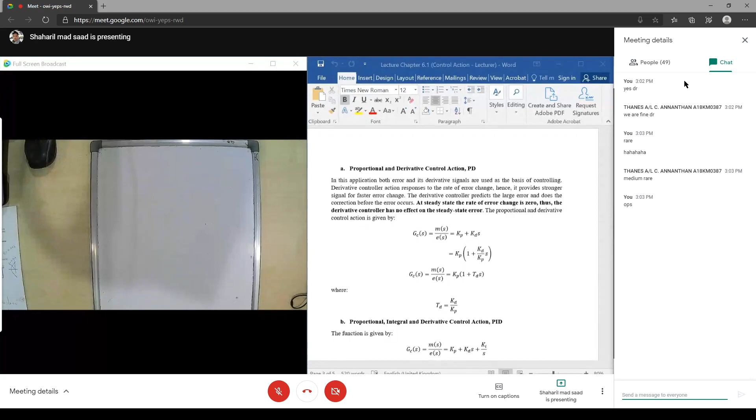Okay, for today's class, so what I promised to you, we're going to do some revision about test 2. Your test 2 is this Sunday, right? And what did I mention to you?

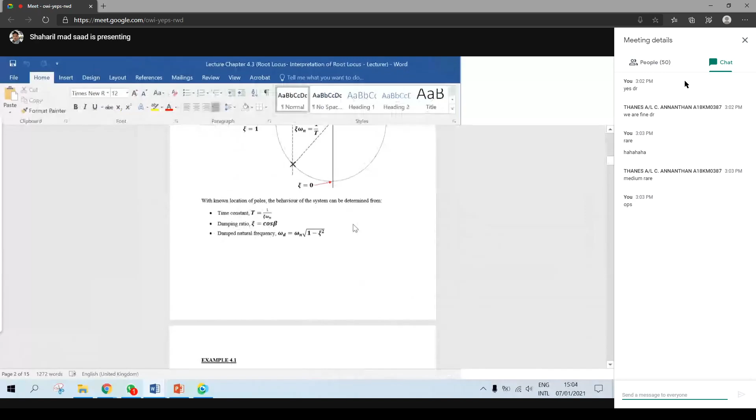Okay, stability and root locus, interpretation of root locus, right? Normally this topic is about interpreting what is the value of k at certain roots you got, and so on. This chapter is normally covered as the last chapter, chapter 6, and normally other lecturers don't teach this chapter yet. So for test 2 you'll focus on stability and root locus, and you need to remember and know about frequency analysis, up to the block diagram in series - sorry, up to frequency analysis in series.

Okay, so I have shown you a few things on how to do it quickly using the calculator and so on. So for today, I hope that we can do some revision about it, all right?

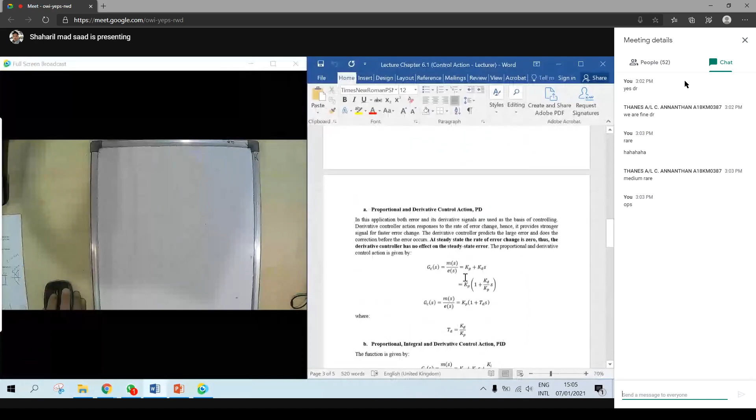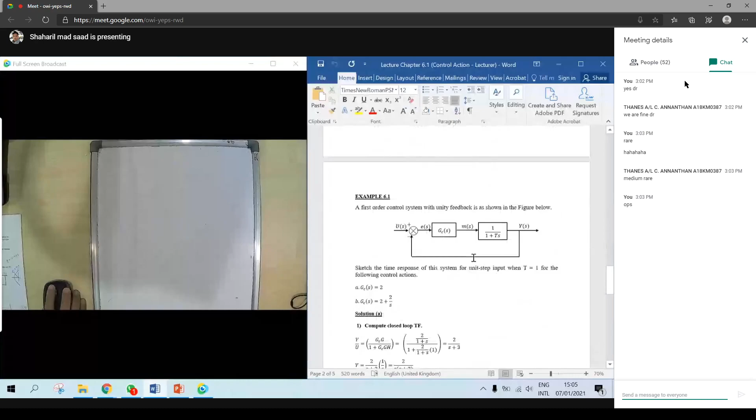However, for the root locus, I will go through our next topic - that means we go through the last topic, chapter 6, because this one will implement root locus also. So at the same time we can do some revision about this. Is it okay?

We can go to this chapter, chapter 6. Okay. Right, can I start the class now?

So this is chapter 6. What we have discussed a little bit, I think about 5 minutes, so maybe I can go through it again.

So for the control action, this is the parameters that we're going to control: steady state error, of course, the overshoot, of course, the rise time - normally depends, if your system requires very fast output you can control the rise time. The more important thing is the settling time - how fast your output can achieve the desired output that you want.

For example, your air conditioning - you set it at 20 degrees, then you turn on your air conditioning, so how long will it take to reach 20 degrees? That's why we look at the settling time.

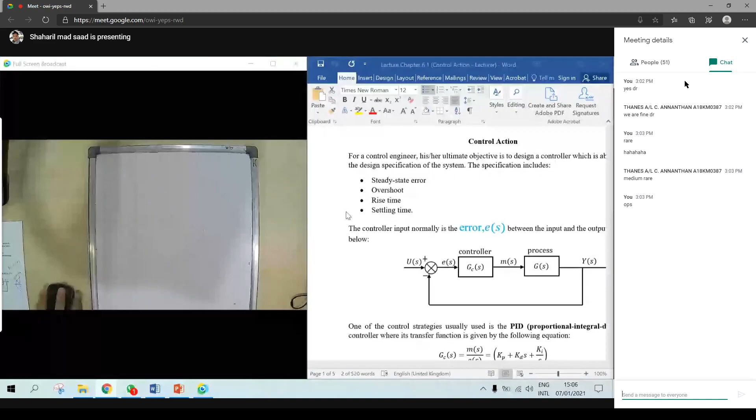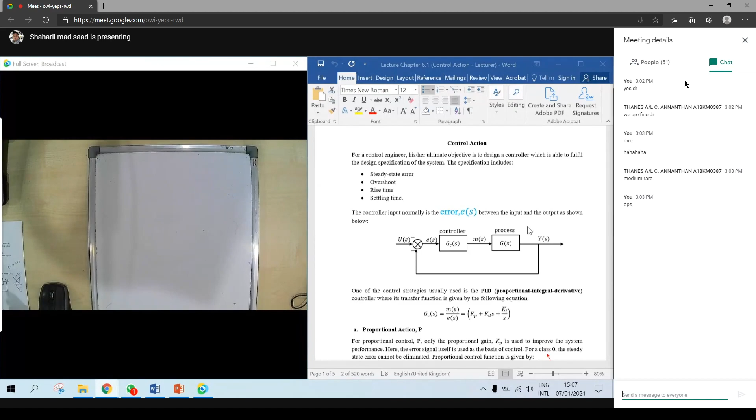For the basic control system, you will have the controller and the process. The process involves the mechanical part, like air conditioning, the circuit, and also the compressor, and so on - that's the process. The controller means you have the remote, right? So your remote sets it - fan number 1, fan number 2, fan number 3. If you set fan number 3, that means it will tell the process, the compressor, to speed up faster than before. Okay, that's one.

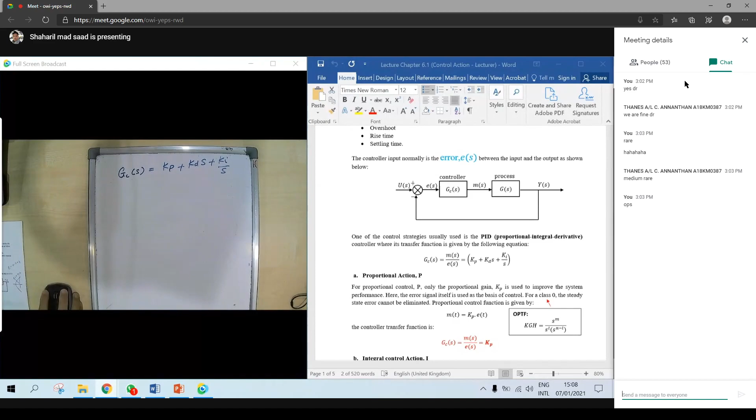Okay, for the basic one, when you implement the PID at your controller, it consists of GC, that means gain for the controller - it consists of KP plus KDS plus KI over S. So this means this is P, this is D, and this is I - actually PID, right? So normally we call it PID, not PDI. Okay, so what is P?

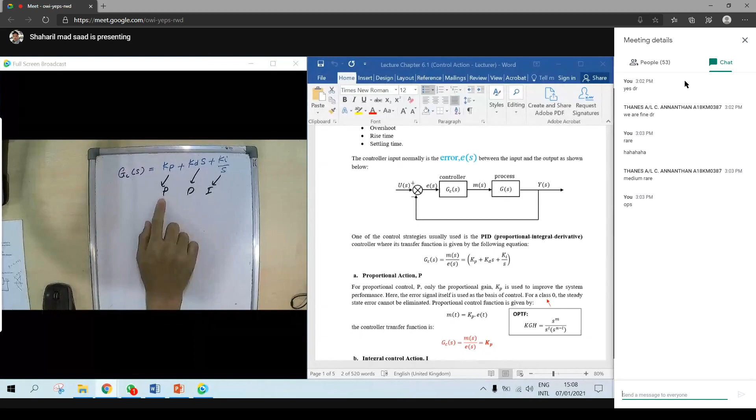P means proportional, where your GC equals KP. You can look at the question here. Integral I is based on this formula, where GC equals KI over S. Actually there are some calculations for how you get this one, so maybe I can show a little bit about this. Okay, so you get the M, KI, integral E dt here.

So when you convert into Laplace, you Laplace it. So this one you got MS, KI, and then you Laplace this one, dt.

So MS here, and then KI. When you Laplace the ET, if you remember back, we got it as ES over S here. Actually, we can use the capital, alright? Because when you Laplace, the symbol will be changed, the capital one. And then what you got here is KI over S.

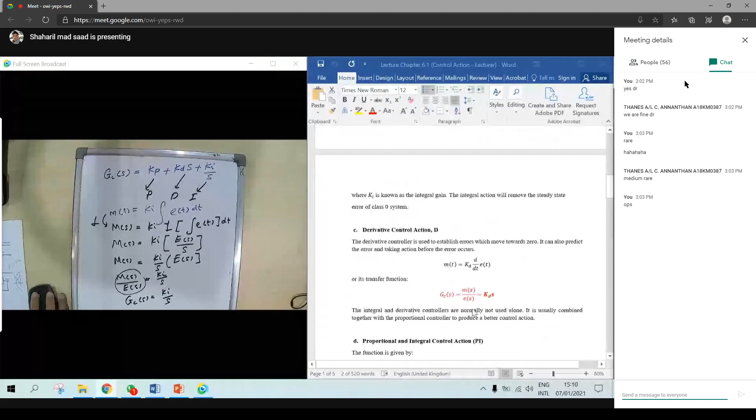The good thing about when you implement the I is you can eliminate the error. For example, for the class 0, you can eliminate it, because we want to achieve the steady state error so that we can get it to 0. And D is given GC equal to KDS.

For the derivative, you cannot eliminate the steady state error. I will show you the graph so that you can look into that.

And sometimes we combine it between proportional and integral. We call it PI. So the controller that you can use is KP plus KI over S because you combine between P and I.

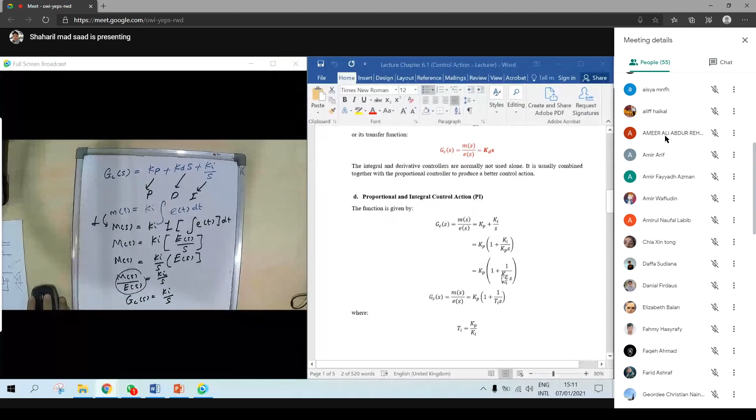Then of course, if you want to make it simple, you can just set KP, and this one is TI. TI is what? It is KP over KI. So when you do it in your MATLAB, you can play around with these two variables, KP and TI.

Some of them we combine between proportional and derivative. Derivative can minimize what we call overshoot, I will show you later. And then the formula will be like this one, KP plus KDS. And to make it simple, KD over KP here, you can make it TD so that you can just adjust only two variables.

This one. And we also can combine P and I and D, alright? We call it PID. So it's a combination between KP, KDS, and KI on S.

And normally, how to change all this value? We can change it manually. For example, you can put KP is 100, KI is 10, KD is 2. And then you can get the steady state error, and you can get the overshoot, for example, and you can get the settling time.

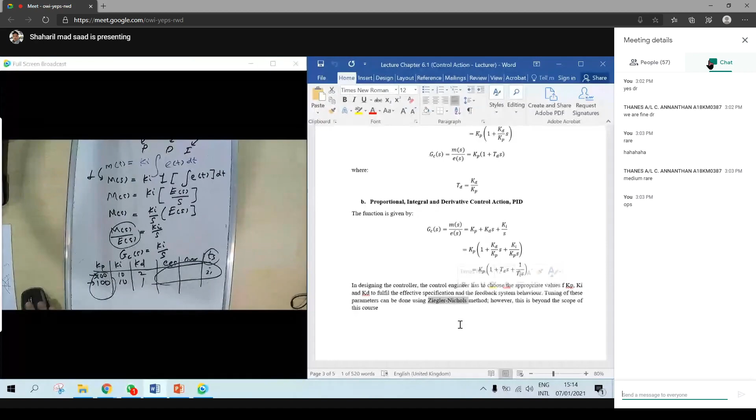If we want to get the steady state error almost 0, the settling time that can be accepted like less than 2 seconds, for example, so we can use this method. However, we don't cover this in this class.

I like to show you this one so that you can get it. What is the purpose of using KP, KI, and KD?

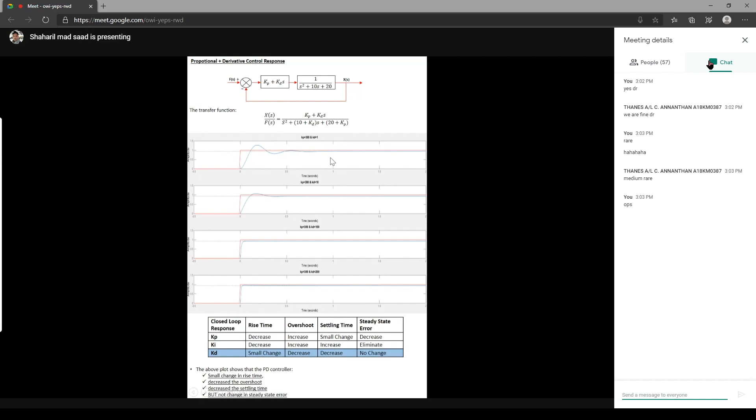However, there is no change in terms of steady state error. You will see this steady state error has almost no changes. But you can eliminate the overshoot, and the rise time will affect also a little bit. The settling time is also decreased a little bit, because like this one, the settling time maybe at this point. When you put in KD, settling time will be decreased a little bit.

And when you combine KP and KI, you fix the KP and then adjust the KI. You will see that the KI will increase a little bit the overshoot, but the good thing is the steady state error can be eliminated.

So that's why an engineer likes to combine it with the integral or KI, because we want to eliminate the steady state error. For example, you set your temperature to 20 degrees, we want to get the temperature at 20 degrees, we don't want to get the temperature at 22 degrees, 23 degrees. So we can use the integral. This is the function of the integral.

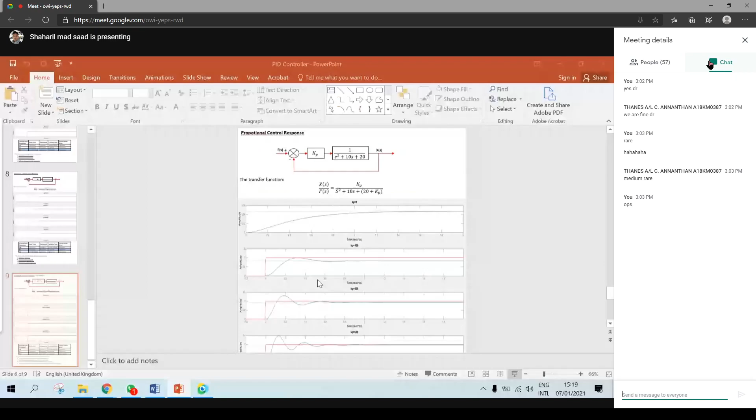And when we combine all three, P, I, and D, of course we can eliminate the overshoot, and then you can get the steady state error almost zero, actually zero. We can decrease the rise time and settling time. So far, do you understand the purpose of P, I, and D?

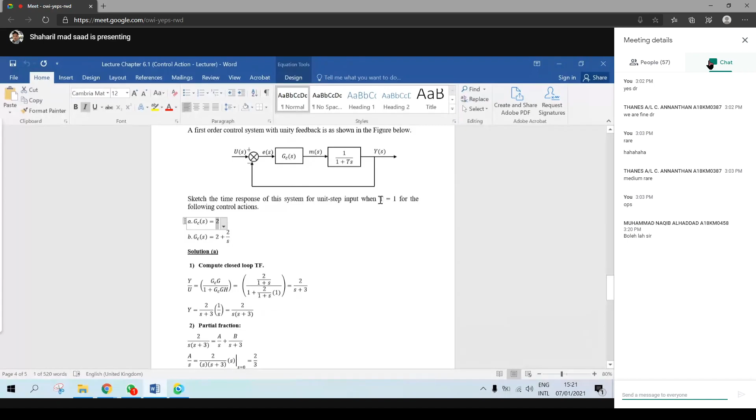Let's say you only use KP. You put GC equal to 2, so that means this one is 2, and for T equal to 1 here. So what you got is this kind of equation. You do some fraction, and then you got this equation.

Okay, let's say you combine. You use KP and KI. Your KI is 2 over S. So I think you can see the difference, right? This one is KP, and then this one is KP and KI. KI, that means KI over S. So this one, KI is 2 over S.

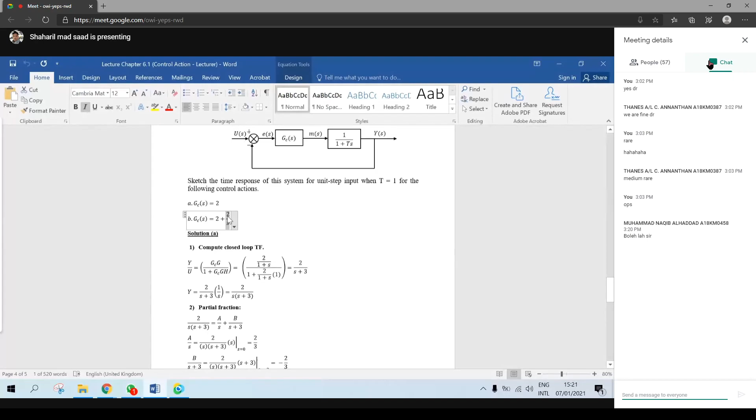Alright, okay. Any question that you want to ask? Any questions? Not yet, right? Is this clear so far? Okay. Any question? No? Okay, no question yet, sir. Alright, not yet.

Okay, alright, so let's look at another chapter. This is what we're going to focus on for your test 2. Generally, the controller is designed — never mind this one. Let's look at example 6.1.

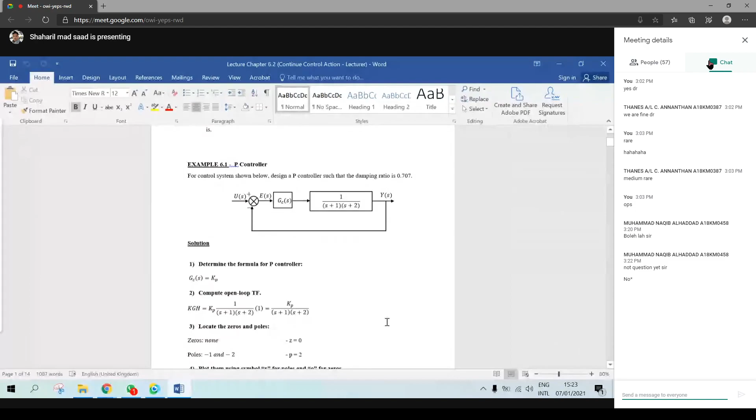This is when you apply the P controller. For the control system shown below, design a P controller such that the damping ratio is 0.707. In this case, you want to design a controller, example 6.1. So design the P controller so that it can fulfill the damping ratio of 0.707.

So the first thing is, in this block diagram, we know this is Kp. So first, GC(S) is equal to Kp. Our objective is to find what value of Kp makes the damping ratio equal to 0.707.

Okay, and then number 2, you need to compute the open loop transfer function. Remember, for root locus, the first thing you need to do is find the open loop transfer function. How do you find it? The formula is KGH. So you need to look — this one is K, this one is G, and this one is H.

So KGH right now is equal to Kp times 1 over (S plus 1)(S plus 2), times H which is 1, so you don't have H now. This one is equal to Kp over (S plus 1)(S plus 2). This is your KGH. So for root locus questions, normally Kp will be given to you, and you just draw the root locus and so on.

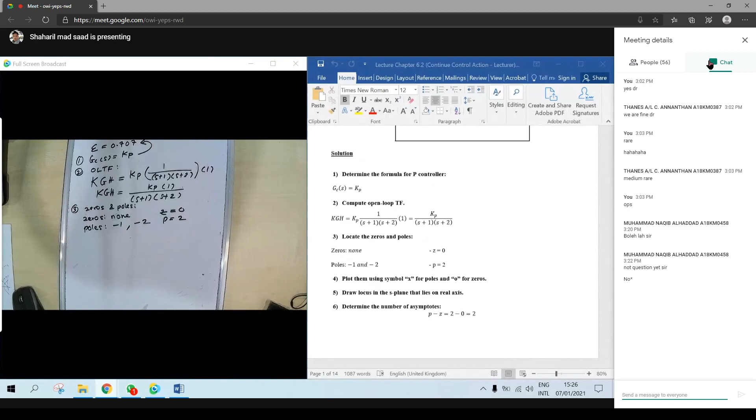And then the poles — that means S plus 1 equal to 0 gives minus 1, and S plus 2 equal to 0 gives minus 2. So how many zeros? Zero. And how many poles? Two. Okay, this is the step of root locus right now.

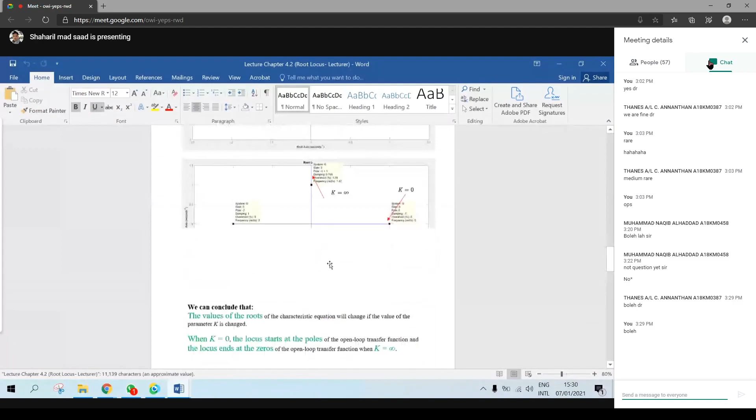Chapter 4, the root locus. You need to remember this - let me show you again. This is the root locus procedure. You can see the 2 poles here. So this one, the first one, will go to the left. And this one also goes to the left. This one is the pole and this one is 0, so poles try to find the 0. You need to draw on the real axis first, and then this one tries to find another girlfriend here.

Okay, try to look at back. Alright, so we have drawn this one. Done, and then determine the number of asymptotes.

The number of asymptote - number 5, we have drawn the root locus on the real axis. Number of asymptote is P minus Z, the number of poles minus number of zeros. You got 2.

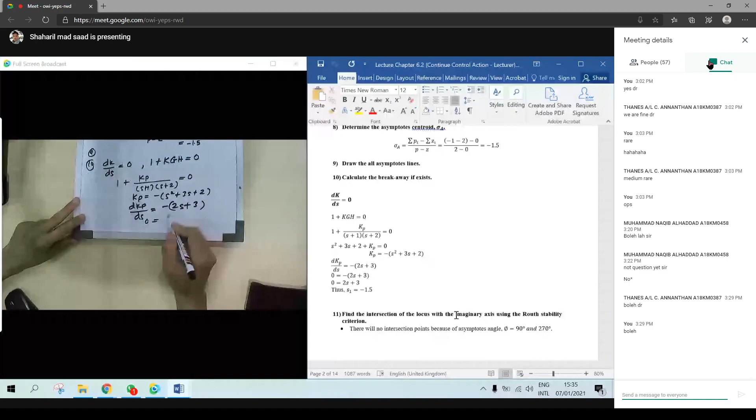Then you will find that dk over ds is equal to minus 2s plus 3. So dk over ds equal to 0, minus 2s plus 3, then you got s equal to minus 1.5.

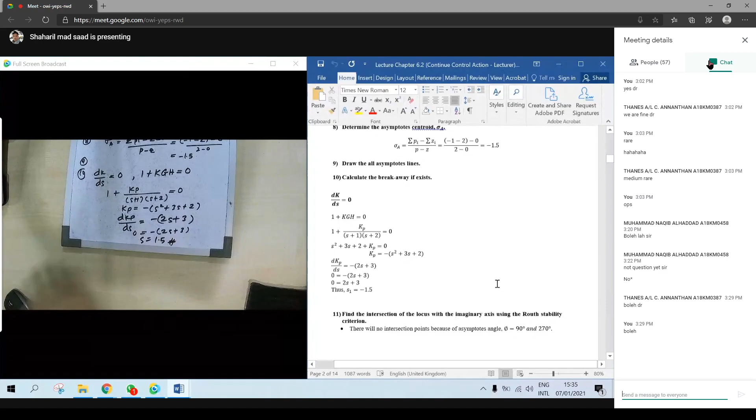Still remember this formula, kan? Kena ingat juga lah, you need to remember. Okay, so maybe in order to solve it, you need this formula. Alright, so far so good. Okay, boleh? No question, if you have any question, you can ask.

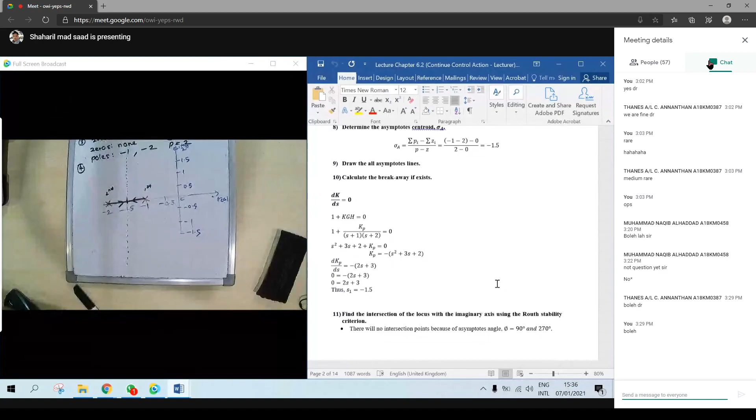Now we got it, the breakaway is also at 1.5. Okay, and the next step is the next step. So that means your root locus will go up, almost touching the asymptote, right? And then this one will go down.

It doesn't matter if you draw this one going up first or going down first. It doesn't matter, because both will be symmetrical. The both will be symmetrical, okay, right.

Step 11, so you need to find the intersection into the imaginary axis. It depends on your asymptote. If your asymptote is just a straight line, right, this one 90 degree, that means you don't have any intersection to this imaginary axis. Your root locus tries to follow the asymptote.

Okay, if your asymptote is like this one, right, 60 degree, so you will have a chance that your root locus will go and cross the imaginary axis. Okay, so right now we don't have any intersection to the imaginary axis. Then of course you complete your drawing there, right? And in order to find the value of Kp here, we need to fulfill what we want before.

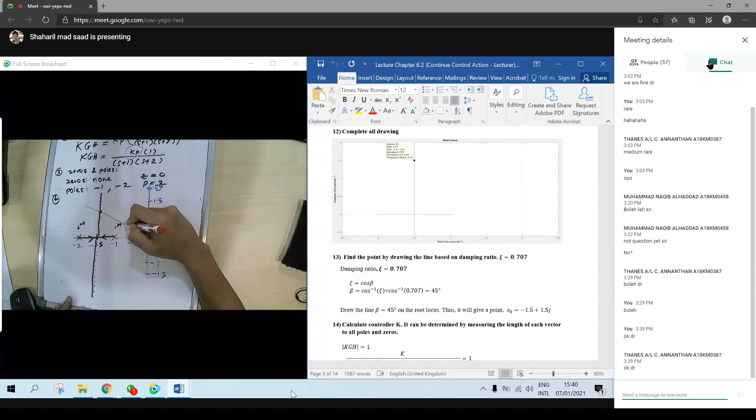Okay, alright, this part, right, for your test 2, I think it will not be asked, right? It will not be asked. You will do until you draw the root locus, right? For this part, only we will ask for the exam. I hope so, right? I hope so.

Because what I mentioned before, for the topic of interpretation of the root locus, some other lecturer they like to teach that topic as the last topic, like this one lah, chapter 6. Okay, boleh faham? Okay, do you get what I mentioned before? Boleh?

Okay good, so I just show this one, 45 degree. Alright, then you will get this point. Okay, so that's why for chapter 6, you need to draw on the normal graph so that we can get what the value is about.

Okay, so at this point you got it, the value is s equal to minus 1.5 plus 1.5j. Okay, imaginary is your j lah. Alright, yeah, right.

Okay, our objective is still there. We want to find the value of Kp, right? So how to find the value of Kp? You need to choose your roots here, connect it to all roots. Then you can find the degree and so on, but we don't want to do that, that one is quite difficult. So you do the shortcut one. What is the shortcut one?

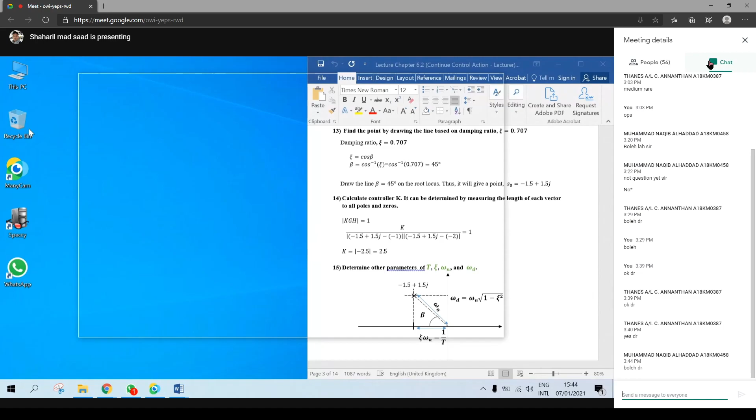First one, you set it, go to setup, go to mode, and you choose complex, and also shift setup, go again to 3, complex.

So now our A equal to s equal to minus 1.5 plus 1.5i. Then we can save it.

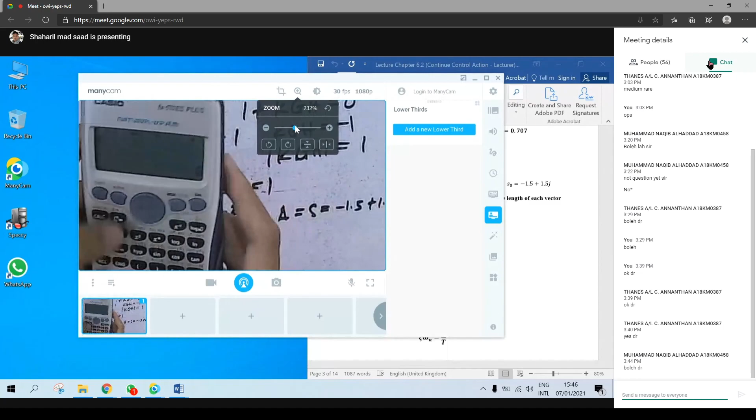So this one, that means a plus 1 times a plus 2. You need to time it by 1. So now you got it, alpha a plus 1, 2 times with alpha a plus 2.

Oh yeah, where is A? Alpha A plus 1 times alpha A plus 2. We got it here.

2.5. How to see the magnitude? I've forgotten. Guys, how to see the magnitude? Do you remember?

That's why we need to change to this, I think. Complex and 2. Yeah, 2.5.

Yeah, okay, so you got it the magnitude of 2.5, and this is the phase angle, right? It doesn't matter, we don't want to look at the phase angle, so we just take the magnitude, which is 2.5. So the answer is 2.5.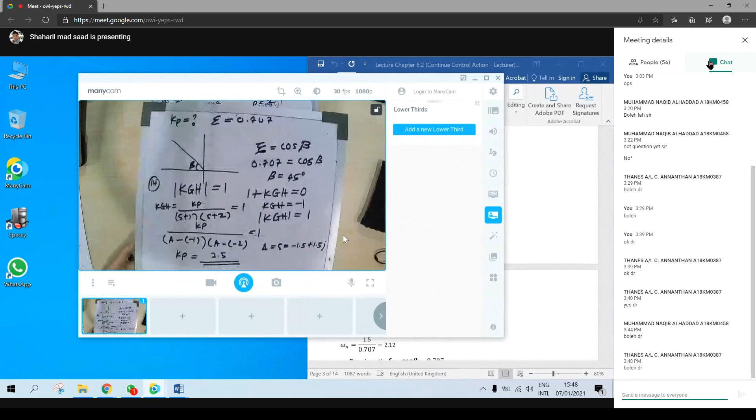Alright, good. Okay, coming back to here. So you can find it by using the manual method, right, but it's quite difficult, you need to find this length and this length and time. So just straight away use the calculator. I don't know if other sections will teach this method or using the calculator.

Alright, and coming back to here, so we have achieved our objective. The first objective is we want to get the value of Kp where your damping ratio equals 0.707. So we found that the Kp that we get is equal to 2.5.

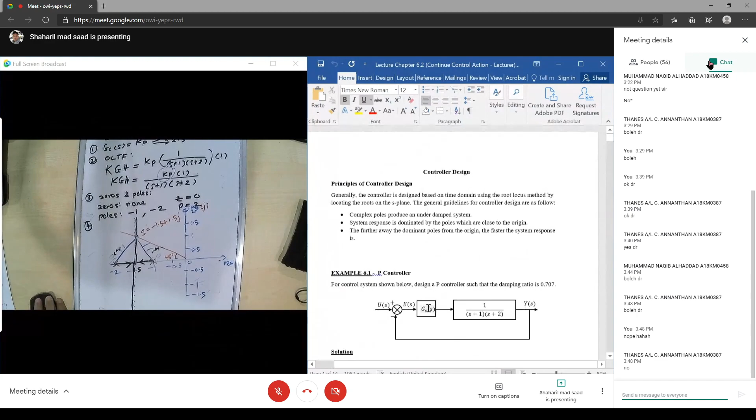That means your Kp here is 2.5. Okay, done. So you also can find other things about this one, like the time constant. Time constant equals 1 over damping ratio times omega n. From this, you also can find omega d and so on. This is the value you can get for the root s1 minus 1.5 plus 1.5j.

And something else, what is it? Example 6.1 done. Okay, if you look at the time constant, it equals 0.67.

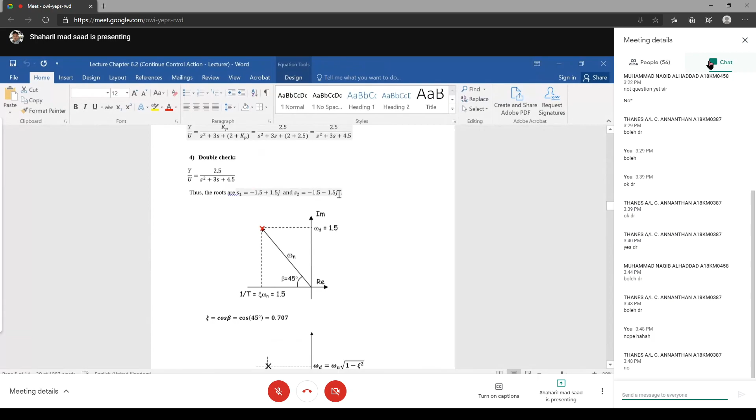This is only you adjusting the Kp, right? How about you try to adjust Kp? Okay, the second method, if you don't want to use root locus, you can use the second order equation like this. You just compare, and you will get the same value. If we got the same root, then you can get the Kp.

Alright, example 6.2, where you only use the integral, only the I. So how to implement the I? You just put Ki over S here, Ki over S. So now your KGH will be different: Ki, S, S plus 1, S plus 2. And the objective is the same: we want to get the value of Ki where the damping ratio equals 0.707.

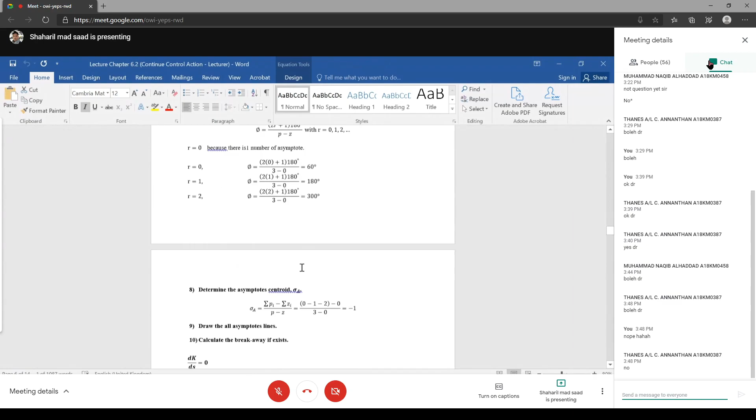Okay, then you do the root locus again, blah blah blah, do it again, do it again. And then you find the breakaway, you do it again, okay? And then you need to find the intersection, okay? If we look here, these are your roots: that means 0, -1, and -2, okay?

So now the real axis, the root locus will be like this, okay? And then it will have some breakaway, okay? And I think the asymptote right now goes to 60 degrees, yep, 60 degrees, 180 and 300. So that's why your root locus goes like this and it will cross your imaginary axis. So in order to find the intersection, you need to use the Routh table. I think you know this one already, right?

So in order to find the Routh table, you just put 1 and then you skip. 1, 2, okay, and the others are 0. And the other one is 3, skip 2. So 3 and K, right? Then you need to multiply: 3 times 2 divided by, 3 times 2 minus 1 times K divided with 3. Okay, then you get this one.

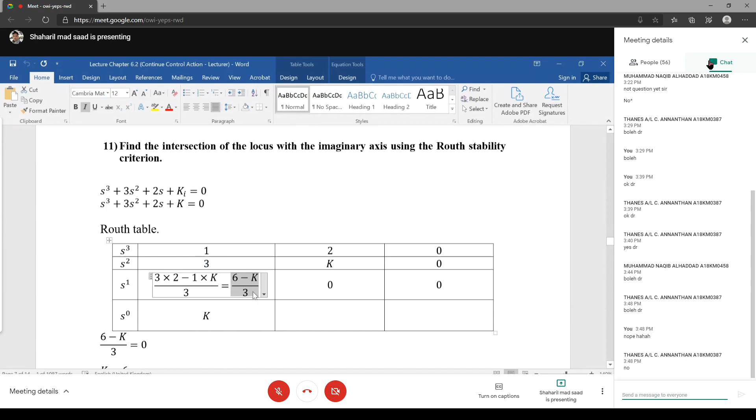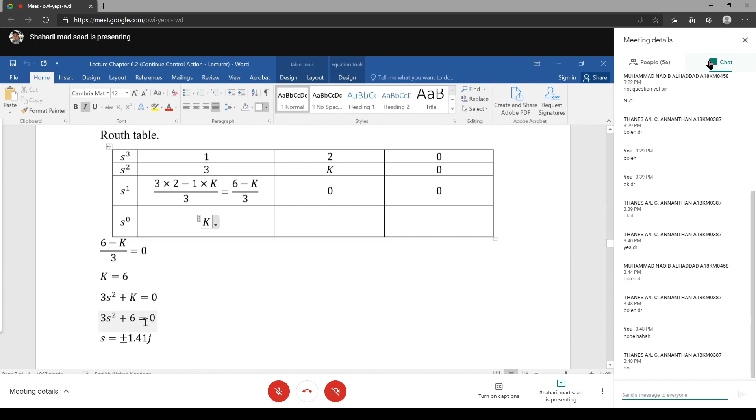And this one will be 0: 3 times 0 minus 1 times 0 equals 0. And this one, K, so what is it? This one times this one minus this one times this one, right? Equals 0, so that's how you get the K. So we can find the K from here, and we get K equal to 6, right? And then we can get two values, right? So this one will be your imaginary axis.

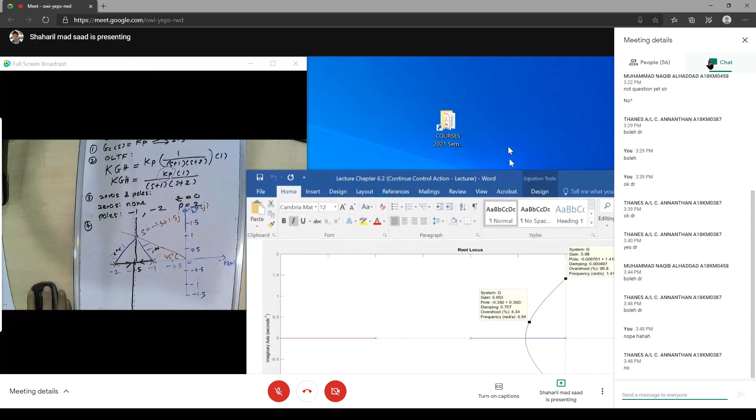So for your root locus, until here, that means you need to draw depending on the question. So if your root locus crosses the imaginary axis, you need to find this value. Alright, so in your graph, you need to state that value. If you draw it on normal paper, it will be better. But the marks will be no different, as long as you can show the value.

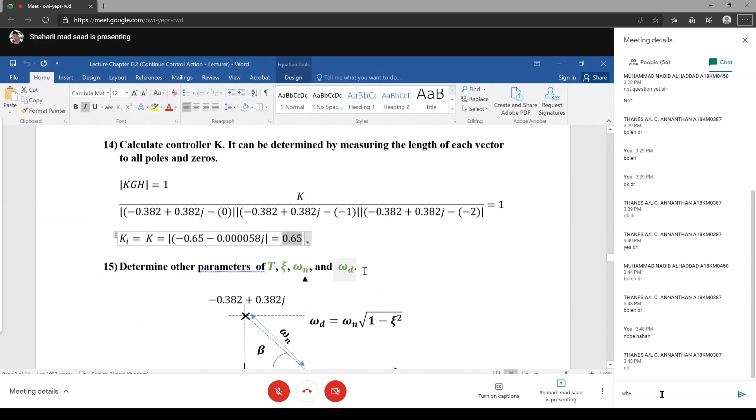Okay, alright, and then we try to find the KI. So we just cross the line from here at 45 degrees, and then we get it. Yeah, you see that we got the value minus 0.382 plus 0.382j. Okay, we get this value, and then you use that value, right? Use that value to get the KI, right? And then we found that we get the KI equal to 0.65.

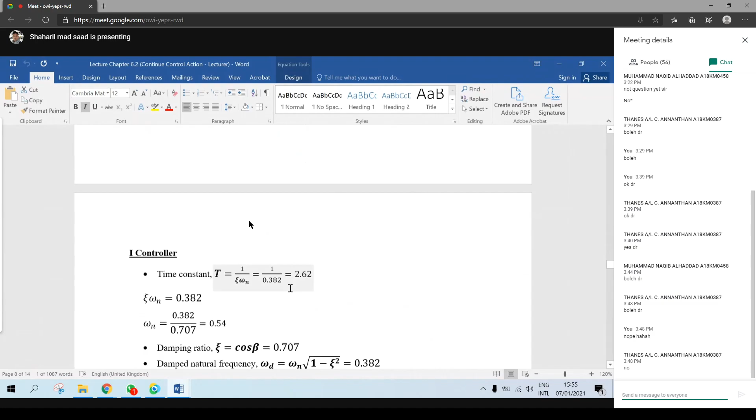And we can get another parameter like the time constant here and so on, and we can compare. We can compare the value that we got before. So this one we only implement P, and this one we only implement I. So what's the difference? You will see that the P controller time constant is 0.67, however the I controller time constant is 2.62.

So remember, back on the first order system, about the time constant: the lowest time constant means a faster response. So in this case, when you use the P controller, that means your system will be faster than the I controller. That's what you can interpret from this value. Okay, can you see that?

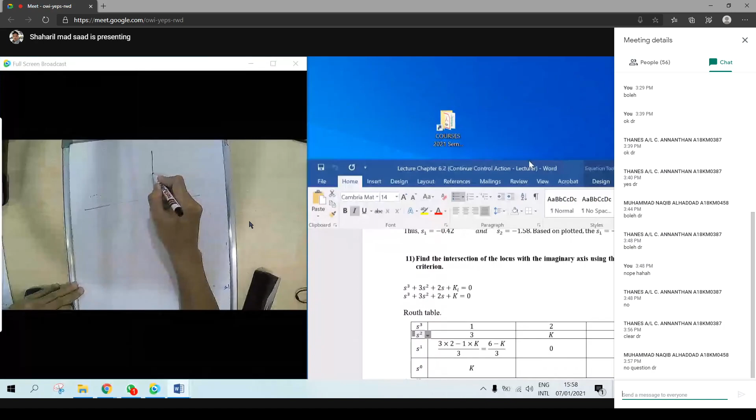And how do we exactly know whether the locus will eventually cross the imaginary axis? The question is already showing you. This is the root locus, and it gives you this value only. And then from this, it asks you what is the equation from here.

Not exactly, sir. Okay, let me try to understand your question, can you repeat it? So my question is, in which case do we have to find the point of intersection? Is it when the root locus is given? So that means in which case do you need to find this value? Yes. It is depending on your root locus exactly.

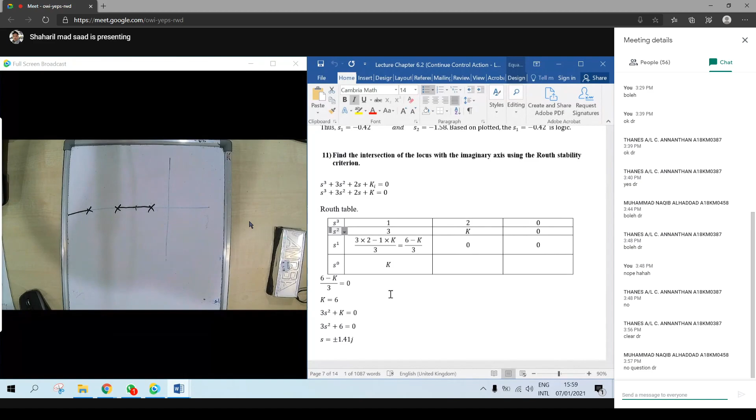So if you have these two poles, and also a pole here, we know that this root locus on the real axis first will be like this, and then like this. There will be some breakaway, but the line for the breakaway depends on your asymptote, which you need to find. If your asymptote is like this, that means it will cross to the imaginary axis, so it will go this way, then this way.

So then you need to find this one, and then you need to use the Routh table. Understood now? All right, thank you. Okay, welcome.

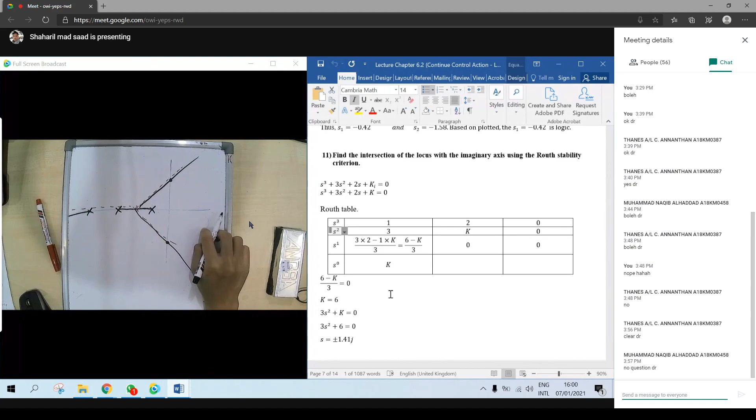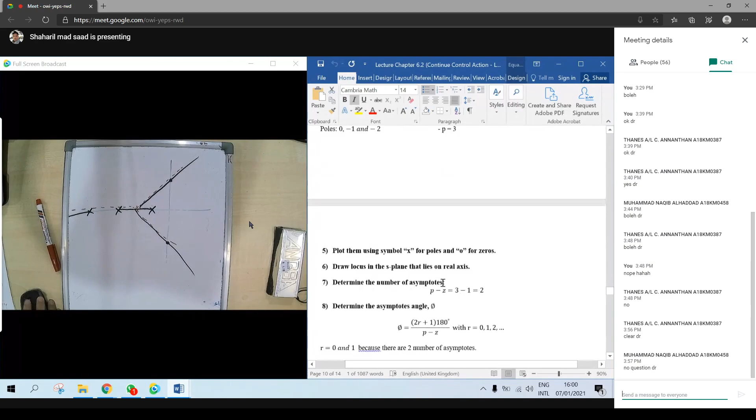Then what else? So we leave this one for the next class. However, I'm going to show you this one when you combine P and I. Never mind, we will repeat it again.

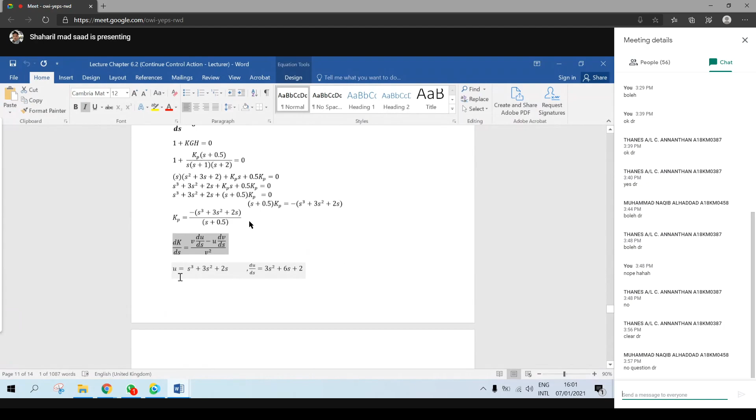Please remember this one. Maybe you need to use this formula. Why do you need to use this formula? This one will be your U, and this one will be your V. You need to use this formula in order to find the K value. This one looks quite long.

So we see the imaginary axis here, the breakaway point, sorry, dK over dS is for the breakaway. You need to find which one will be a logical value, depending on your drawing. So in this case, the breakaway should be minus 1.5. It cannot be 0.37 and plus 0.43, it cannot be at this point, because it needs to be on the real axis. So this one the value will be logical.

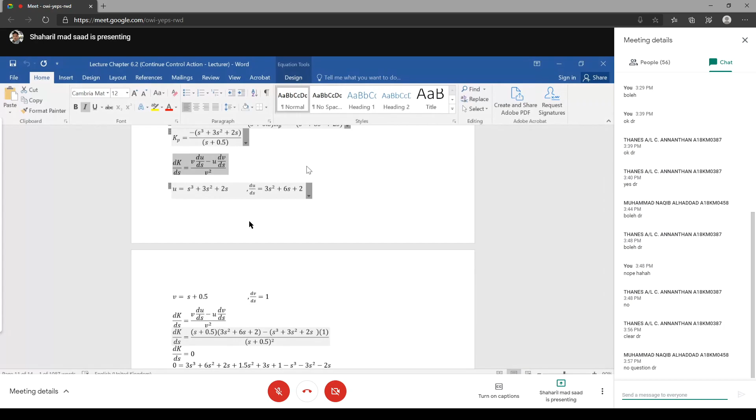Remember this formula if the question asks you. So far, do you have any question? Anything? Any question? Okay, I think we are done with root locus.

Do you have any class after this? Do you have class or not?

Guys, do you have any class after this? Now already at 4, ada kelas tak? Tak ada kan? Ahmed Mahmoud, what time is the test, sir? At night, right, 9 p.m.? For your instrumentation tomorrow morning, right? Okay, at morning, pukul 5 ada kelas.

Okay, alright, good. So I think we can proceed for the next topic for our revision. So this one we will stop here and then continue. Boleh kejap saja. For your stability, I think you need to know how to use the Routh table.

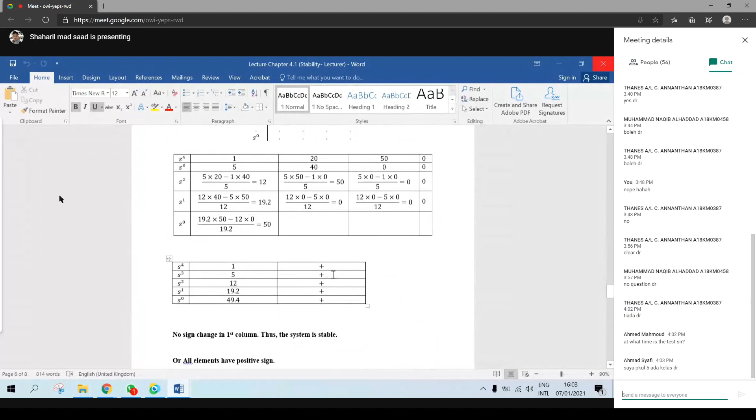Okay, so stability means any changes of your sign. If you don't see any changes, that means your system is stable. Then you need to use the Routh table. If there are changes, for example plus to minus, that means your system is not stable. I think this is quite clear.

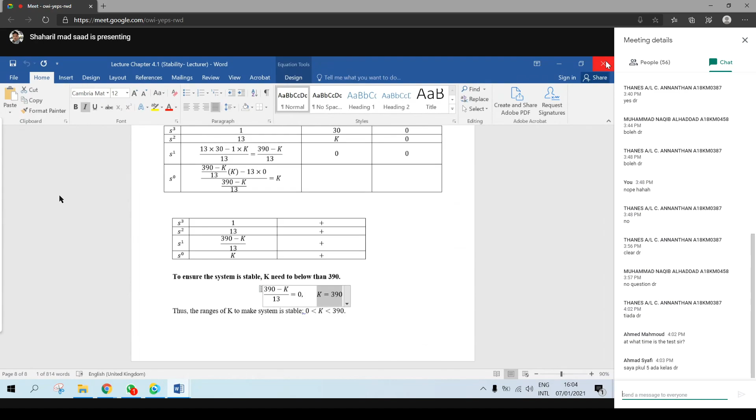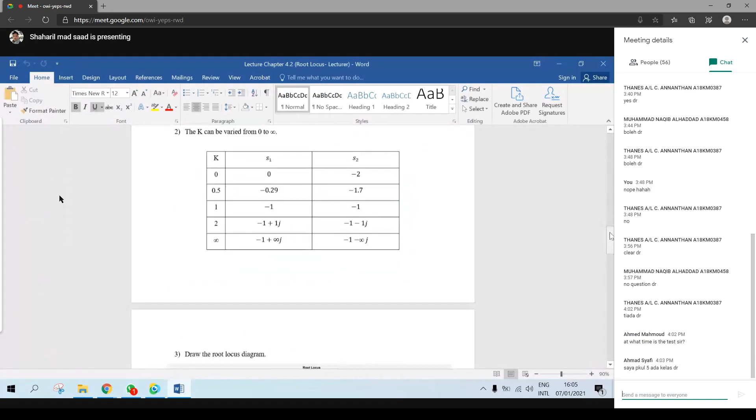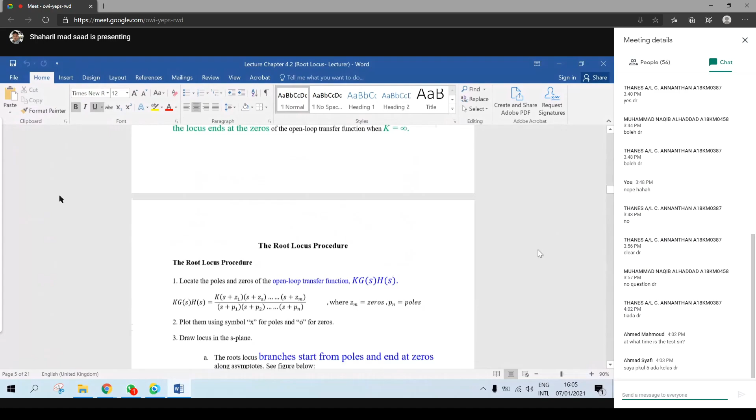Then you can get the value of K here. I think it's quite simple, stability. So the concept is you need to find using the Routh table, find the sign. If the sign changes, that means you can tell your system is not stable. We have covered the root locus already. There are many types, there are procedures to do that, so you need to remember all the procedures. I have shown you clearly in this lecture now.

Okay, and then step number 5, we go straight away for block diagram series 5.2. In this case you need to do also the steps. Let's look at another one, this example. First you need to find the KGH. So you already find K here is 1, G here, and H is 1.

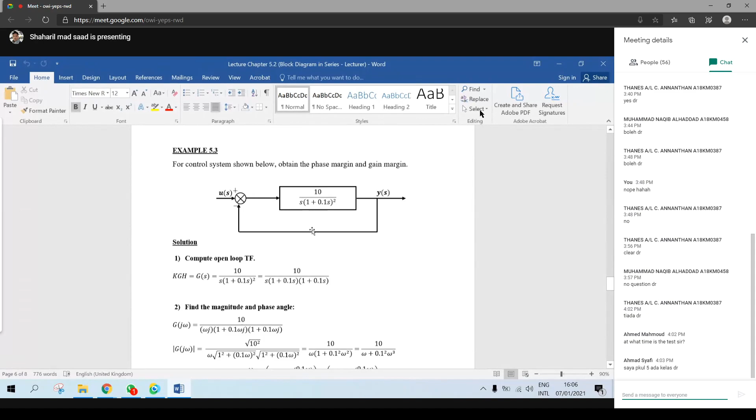So you found this question, and then you can find the magnitude and also the phase angle. This step you can do by replacing S with JW, S equal to JW, and then you get this one. In order to find the magnitude, that means square root of 10 power of 2, and this one needs to be W only, W square root. And this one, 1 square root plus 0.1 square root, square, square and square root, 1 square plus 0.1 W square. Okay, then you get this one.

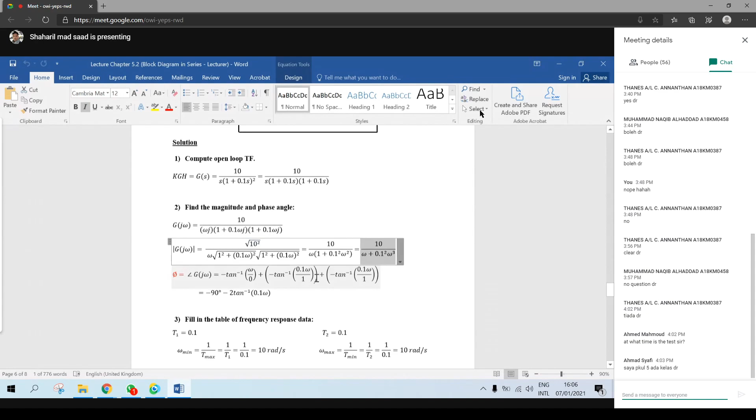And then you find the phase shift, right? Just look at W over 0, J over real, and 0.1 over 1, and so on. Because of 1 over, that means it will be all minus, minus, minus. Then you can get this formula.

And then you're going to plot on the Nyquist diagram, on the polar plot. So like I mentioned before, you can use your calculator, you can get it straight away. But remember, we can find omega min from 1 over T max, and we can also find omega max from 1 over T min.

So T min, that means if we look into your equation, for example you got KGH here, 10 divided by S, 1 plus 0.1S, 1 plus 0.1S. Bear in your mind, you need to make sure this one will be in the format 1 plus TS. So this one also 1 plus TS. Make sure it's 1 plus something, then from this one you can determine which one is the min, which one is the max. From this, you can get your W min and W max.

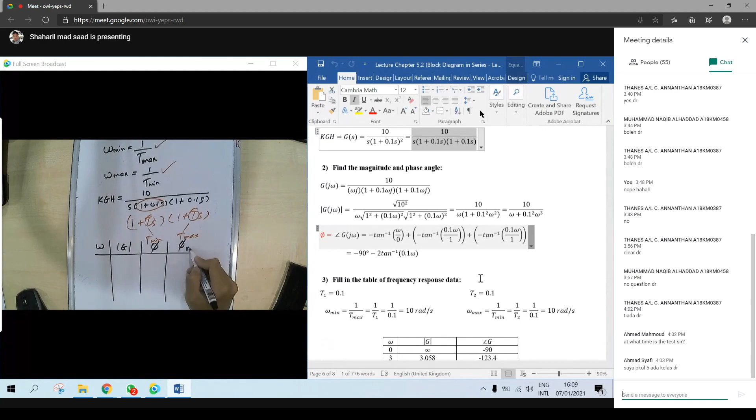This one will be your guideline in order to choose the value. So you got W, and I always write like this: W, then this is your gain, then this is your phi, and this is your phi real that you want to plot. In this case, W is 10 here. You can choose the value - if you want accuracy, you can choose 5, 3, or 0, depending, then you can choose 20, maybe 30. Then you can start to draw the Nyquist diagram.

So how to get this value? It's quite simple. KGH here is equal to 10. This one is what? This one is AI times 1 plus 0.1 AI and 1 plus 0.1 AI. Am I right?

Alright, so where your AI is, you replace it with W. Your AI equal to W, so your W is equal to 0, 3, 5, 10, 20. Same method that we can use with the calculator, right?

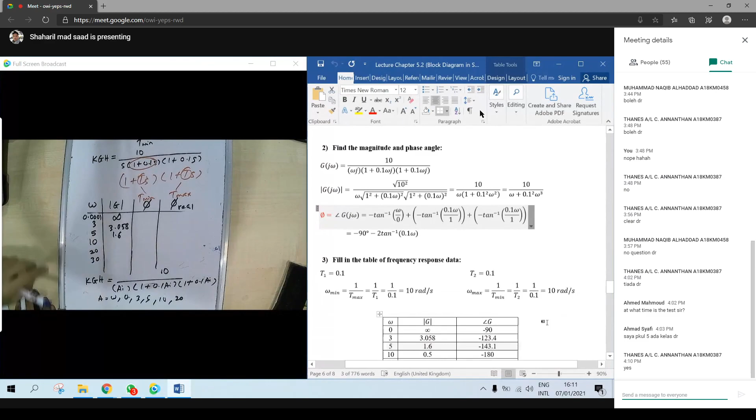Then for the phase angle, you need to be careful. Sometimes your phase angle, you get a positive value, positive 60 for example. That's why you need to do 60 minus 360, so you get minus 300. That's why you will plot the phase angle depending on this. You will plot G and phi real here, but on your Nyquist diagram.

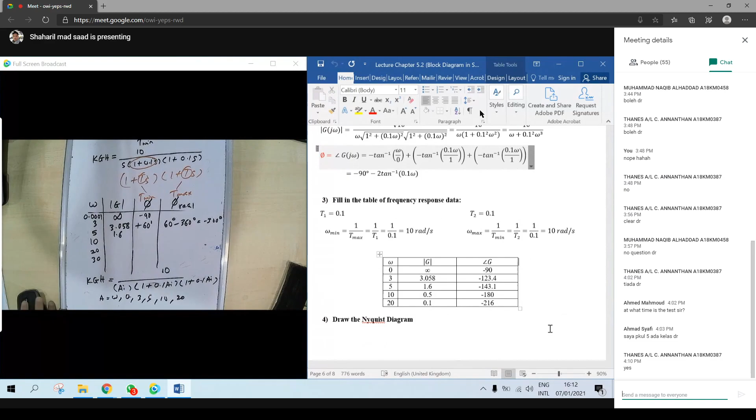This example is Example 5.3. Is it clear? Any questions? Am I going too fast? No. Okay, clear.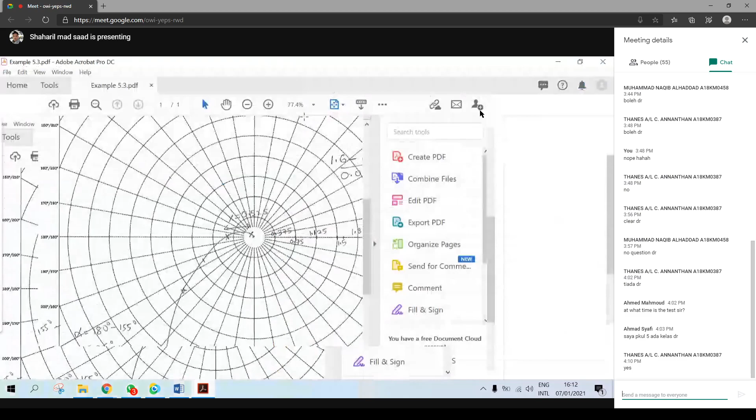So when you want to plot, your plot depends on the value for gain, and then the plot value of your phase angle. So when you want to plot, you find the phase angle equal to minus 123, minus... so 0 minus 120, 0, 10, 20, 30, 120, 123, it will be like that.

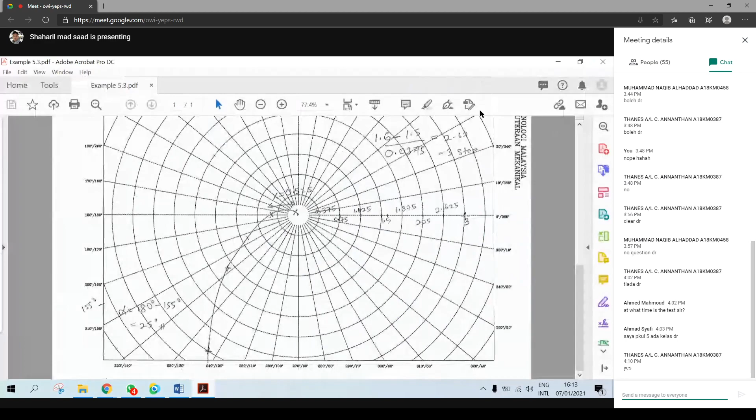This scale you need to divide, depending on your value. So you look at the maximum, which is 3.05, so you can choose the scale value at 3 here, and this starts at 0, so you put 0 and then find 3. So this is 1, 2, 3, 4, 5, 6, 7, 8. So 3 divided by 8, so we start at 0.375, 0.75 and so on.

So you need to be careful with this. In order to find the step, you get the step from how many blocks here, so you can minus with the value before.

For example, this gain is 1.6, so 1.6 is located at this point. So 1.6 minus 1.5 divided by 0.375, divided by 10, because all scale has 10 boxes here, then you get a 3 step. That means from 1.5 you count 1, 2, and 3. Then you bring out, depending on your phase angle minus 143, and here.

And then you start to draw your Nyquist diagram here. That is the concept.

And then from the Nyquist diagram, you also can find the gain margin. In order to find the gain margin, you need to find the X value first. The X value, that means the value for minus 180 here, so you need to find the value from here to here.

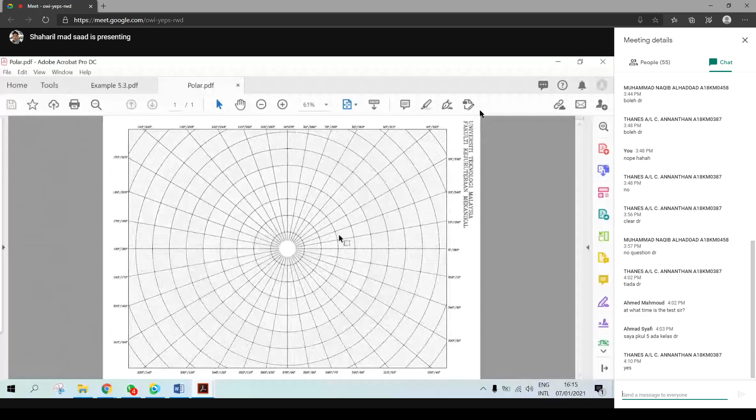This is the polar plot graph. Don't forget to use this graph, okay? And print it, print a few copies. Alright, draw this graph, okay.

So for the next graph, from here you can find the value of x. The value of x here, right? You can get it from here. So for example, 0.525, then you can find the gain margin, 1 over 0.525, and then you will get the gain margin, right?

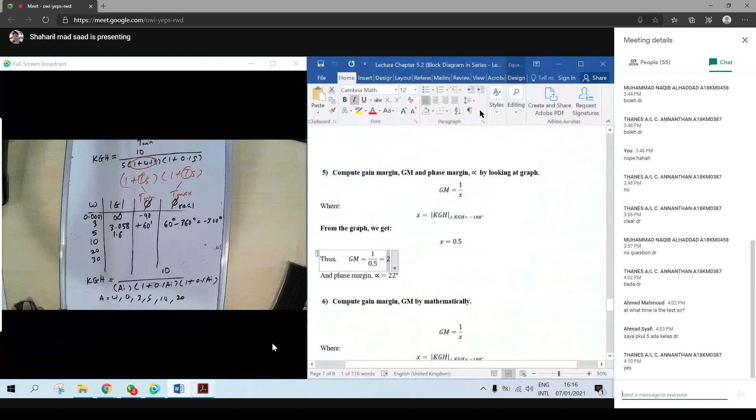And the phase angle, the definition is here. So you need to find the gain for one. Gain for one, maybe like here, okay, 1.

So you bring it, yeah, this gain for 1, and then you cross this line, then you record this value. So the alpha is between 180 to this value. So the alpha, 180 until 155. Then you record this, yeah, this is the alpha, right? 180 until you cross it. Okay, this is the alpha.

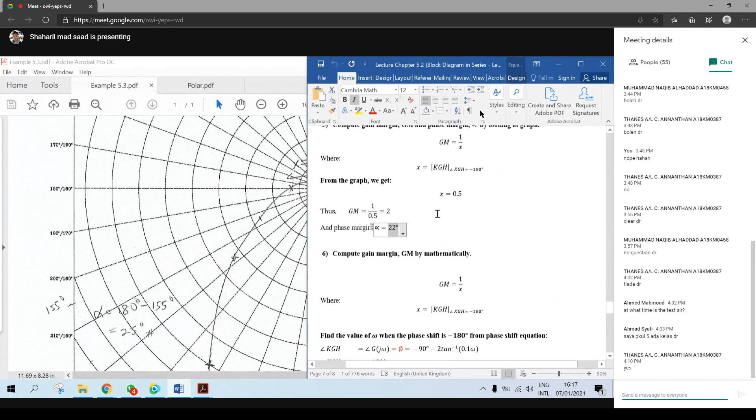Then you can get your alpha from the graph. So you got alpha equal to 2.2, 22. For the x, you got 0.5, right?

Okay, there are two ways to get the gain margin. First one is from the graph, and the second one is mathematically. So mathematically, the gain margin, of course, equal to 1 over x, and you need to use this formula. So how to use this formula?

So put minus 180 degree into the phase shift formula. So you got this phase shift formula from before. Then you put the value of minus 180 into this formula, and then you can find the omega.

After you settle this one, then you apply the omega to the formula kgh. So the kgh formula that we got before, you apply the omega, and then you can get the value of x. Okay, and the gain margin is 1 over x.

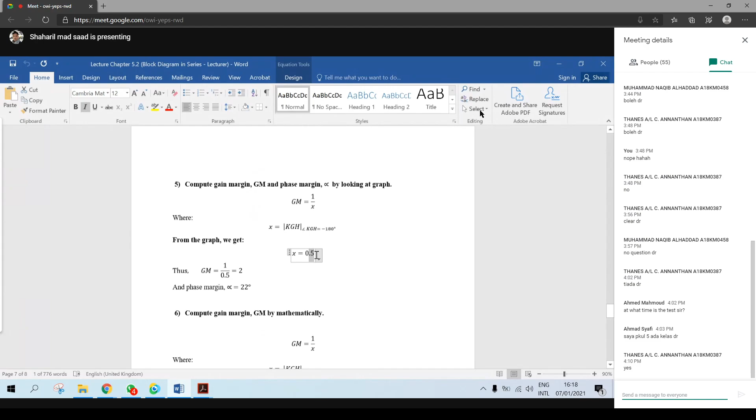So this value should be the same as the value you got from the graph. Okay, you can find this one. And the last one, for the alpha, if you want to find it mathematically...

So 180 plus phi, right, phase angle. So where the phase angle gives you this formula, the same concept, apply 1 to kgh, right, equation. The first one you need to do is this, kgh. So this is the value for kgh equal to 1.

And then after that, you need to find the omega. So you got the omega, right? So choose the logical one, right? Omega needs to be 0 until infinity, okay? Cannot be negative. So you just get this value.

After you settle this, you need to settle this formula, where you apply the omega to the formula of phase shift. So you apply this phase shift formula, apply omega, and then you got this one.

So alpha equal to 180 plus phi, then you got this, this alpha. So alpha, the value for alpha will normally be small, okay? So this value will be the same as the value you got from here.

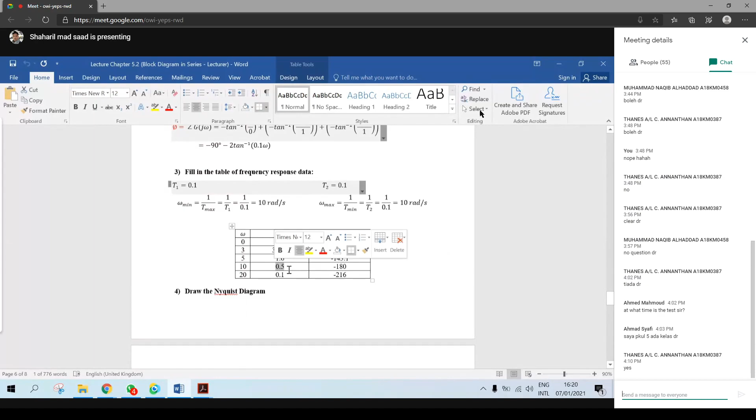Okay, all right, sometimes, right? Sometimes the question will help you enough. So sometimes you will see that, yeah, minus 180, the value is 0.5. Okay, so this is the x value, right? Last semester, yeah, you can get straight away x equal to 0.5.

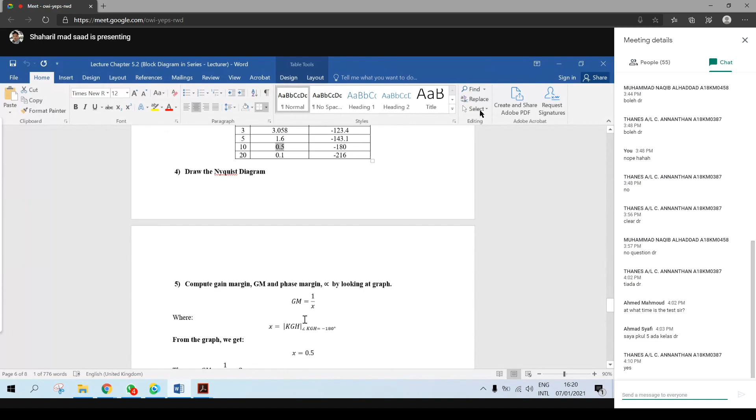Right, like the example. Okay, so far okay? I won't go into detail on how to draw and so on. I think you need to do some revision. So if the question asks you to prove it mathematically, I think you can refer back to this.